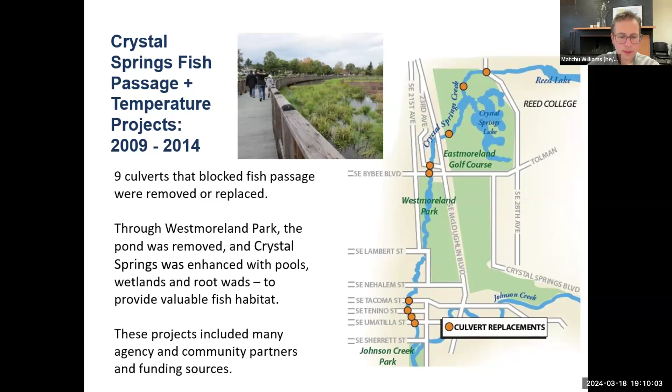So some of the problems and how they get solved. So upper left-hand corner, you can see one of those 9 culverts. It's a corrugated metal pipe. The water is getting squeezed through there, which makes the velocity increase. And the solution to something like this is on the right-hand side.

This was one of the Crystal Springs culvert replacements, where instead of a pipe for a fish to try to get through, you have a much broader opening, and you've got a rocky bottom that matches the stream bed. So it's like a cobbly, rocky bottom, so that fish just have a swim-through condition.

In terms of the lake at Westmoreland Park, the Westmoreland Pond, you can see a before and after picture there. So the upper is the before picture where there was a pond on Crystal Springs at Westmoreland Park. Crystal Springs comes in from the left side. It would go into the lake at a certain temperature, which I'm going to discuss with you in the next slide. It would get heated up in that pond, and then it would come downstream at that higher temperature.

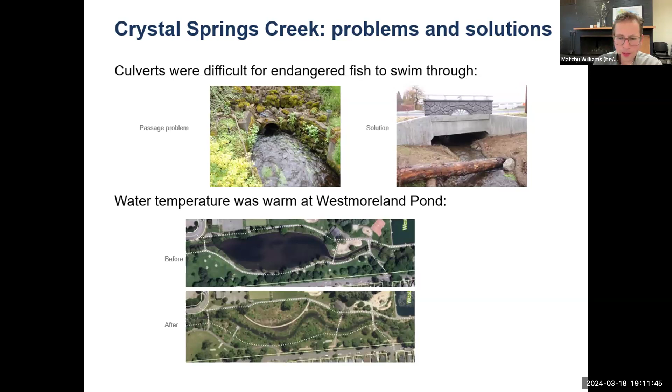Now, on the bottom slide, the current condition is that the water comes in at a certain temperature, and then it just moves through the stream channel at the same temperature and exits at the same temperature. So it doesn't heat up through this stretch anymore. Next slide.

So I'm going to just slow down here for a second. Remember that I said that the springs come out at 13 degrees C. And if you look at both of these charts, you'll notice that they start at 15 and go up. In a slide or two, you'll see a slide that includes the 13-degree area.

So the red line is the water quality standard that we're trying to meet for Crystal Springs Creek, and that's 18 degrees C. Well, let's start with the blue line. The blue line shows you water that was coming in to the Westmoreland Pond back in 2012. And the upper line, the black line, shows you the water temperature of the creek as it left the pond.

So on many days in July here, we're showing you that the pond heated up the water temperature 3+ degrees. And it's already coming in to the project area close to the standard.

At the bottom chart, you can see that after the pond was removed, the black line and the blue line are following each other quite well, meaning that the upstream and downstream temperatures are the same going through this area. So the high temperature was corrected by this action. Next slide.

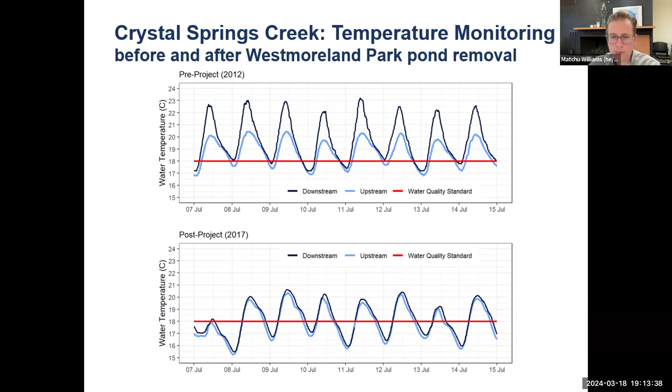All right. Okay, Steve, yeah.

Yeah, thank you, Jennifer. Okay, so Jennifer was talking about the Westmoreland Pond downstream, which is a completed project on Crystal Springs Creek. So we're going to come back now to Crystal Springs Lake itself, where we have a similar situation. We have a number of very cold springs that discharge into Crystal Springs Lake. As Jennifer mentioned, those springs are about 13 degrees Celsius. Well, it's not ice cold, but that cold water comes into the lake basin.

And because the lake is a shallow lake and it's oriented north-south, that water is exposed to the solar radiation, especially in July, August, and early September. So the very cold spring water comes out of the springs. It's in the lake for more than a day, its residence time, and it gets heated up while it's in the lake. BES has recorded temperatures of 20 degrees in the lake, even moving upward toward 25 degrees in the lake. And then that warmer water is discharged downstream as it heads down Crystal Springs Creek.

So we've taken some really cold water, we've warmed it up, and then sent it on downstream. So this project is hoping to reduce the warm up of the water in the lake. And we're gonna show you how in our concept plan here in just a moment.

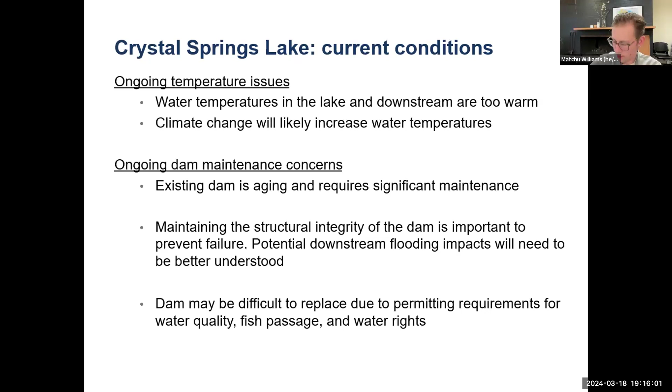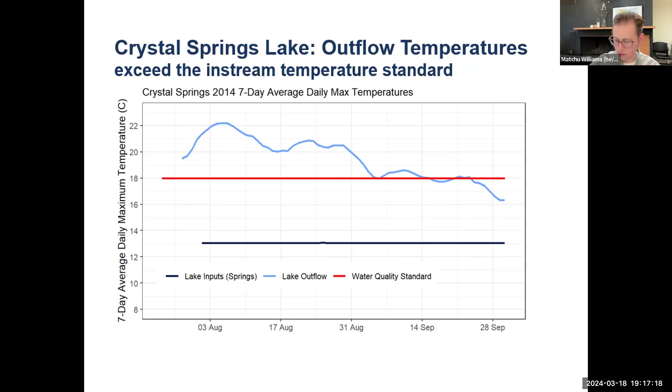All right. Yeah, thank you. We have one last piece here on the existing conditions. Steve mentioned that this dam has been at this location since at least 1920. This is one of two of the main outlets from the lake back down into Crystal Springs Creek. And the dam does not allow fish passage. And over the years that the dam has been in this location, it's required significant maintenance. So this project gives us a real opportunity to improve this outlet from the lake, both from a function perspective and from a maintenance perspective. Next slide, please.

So this project has multiple goals that can address the needs of several stakeholders. The goals are to restore the environmental health and habitat at Crystal Springs Creek by reducing the water temperature from Crystal Springs Lake and improving the habitat along the creek and lake edges; removing, improving, or reconfiguring the dam that'll help reduce the residence time of the water in the lake that Steve was talking about; and removing invasive species with a special focus on yellow flag iris, which many of you have probably seen out there.

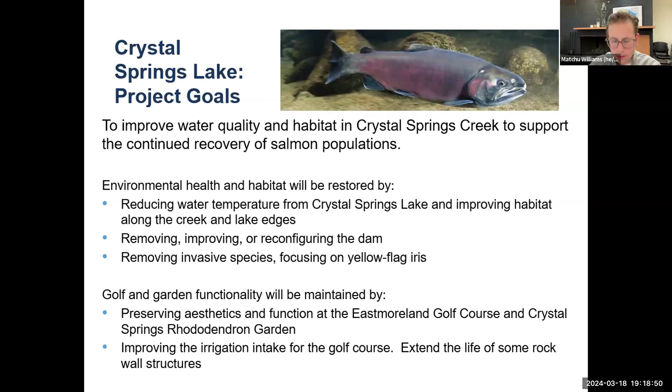Another goal is to maintain or improve the functionality of the rhododendron garden and the Eastmoreland golf course by preserving the aesthetics and the function at both of those locations, and by improving the irrigation intake for the golf course. There's also potential for this project to extend the life of some of the rock wall structures at the garden that have been a maintenance challenge. Next slide, please. I'm handing off to Jennifer.

Great, thank you. In 2019, we started working with project partners to explore a concept planning process to start addressing both the dam and the temperature issues. So here you've got a list. We worked with the Eastmoreland Golf Course and Golf Advisory Committee group, the Friends of Crystal Springs Rhododendron Garden. We did some work with Crystal Springs Partnership, the Native American Community Advisory Committee. We had the Bird Alliance of Oregon and Green Spaces Institute involved, as well as the Johnson Creek Watershed Council.

This early concept planning included those stakeholders, and as we move further along in the project into design, we'd like to involve the neighborhood associations and other partners in the design process. Next slide.

So again, kind of where we are in the project right now, we are just finishing up our concept planning phase, and we'll be talking to you specifically about how we're moving from the concept phase into the design phase. Next slide.

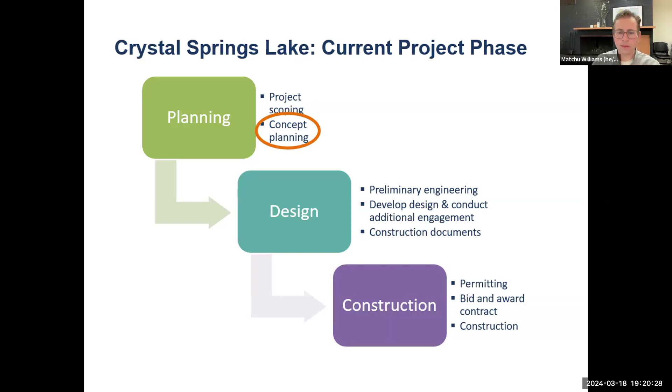And this is just a review of our stakeholder engagement on this project. So in 2019 and 2020, which was when the pandemic began, we did some in-the-field tours. We did workshops, we learned to use Zoom. And then we shared some different concept designs with folks and were able to develop a single concept design that we shared with stakeholders in 2022. And then we got feedback from folks on that, and that is the one that we're going to be sharing with you tonight.

After putting that concept plan together, we did additional work that the project needed and people were interested in. We conducted a biological evaluation and characterization of the site. We did some field work on presence of mussels in the pond, presence of aquatic insects, and then we also looked at a nesting bird survey. We did cost estimating, and then we developed some perspective visuals.

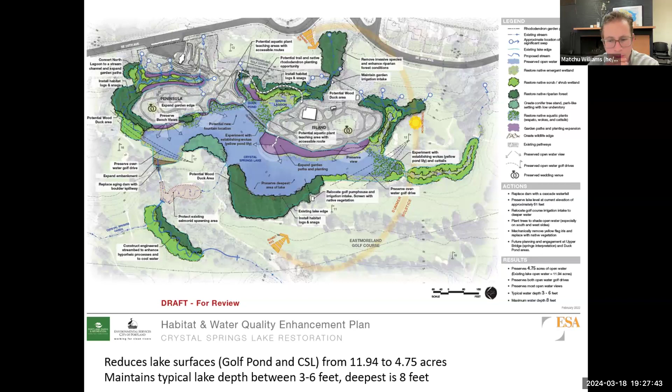Okay, and during the process of developing this concept plan, we worked closely with folks from the rhododendron garden and folks from the golf course. As I mentioned, the garden staff expressed interest in having some additional land to work with to expand their garden a bit. The golf course really wanted to protect those flyover golf drives.

Okay, so alternatives of this concept were modeled by USGS. And what we found was by shrinking the lake, we got immediate cooling benefits in the modeling because of the reduced size of the lake. The tree shading does provide some moderate benefits if we can get trees on the south and west side of the lake. This concept design would significantly reduce lake temperatures, especially under future climate change scenarios. So if we leave it as is right now, the lake will continue to warm as our summers get warmer.

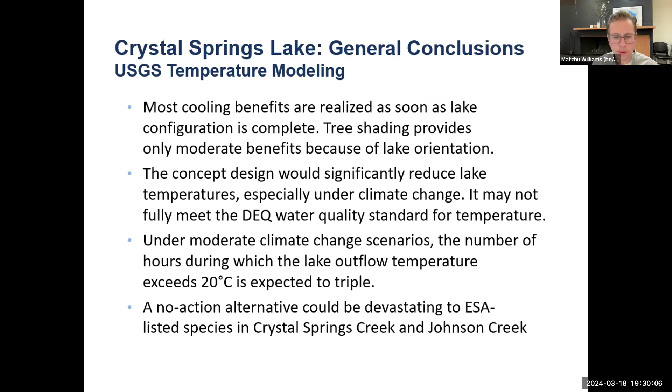Great, thanks, Jennifer. Steve. Yep, gotcha.

So we completed that concept design in 2022, and we were able to move forward then to develop preliminary construction cost estimates of $11.4 million. That, of course, will be refined as we complete the design work, include financial impact if there's any closure to the garden or the golf, include project management and construction oversight.

We also worked with the community, particularly with the Crystal Springs Lake Partnership folks on wood duck and hooded merganser nest surveys as a volunteer opportunity. And we worked with some professional staff to do aquatic invertebrate surveys, and we worked with volunteers on that as well. We also developed 3 perspective visuals based on that concept plan that Steve just showed you, and we'd like to show you 2 of those next.

All right, so this is an artistic representation of the drive on the 17th hole. You see the gentleman here in the tee box, and he's driving out toward, you see the orange flag in the distance that's on the green. You can see some water in between. He's hitting the drive over.

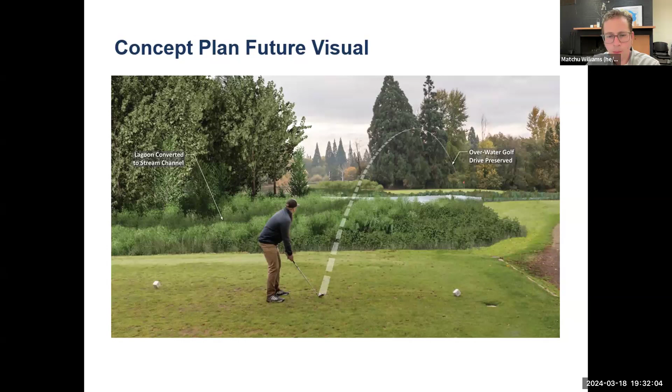In the current condition, there's more open water, but in this potentially restored condition, you can see that there is some wetland vegetation in the foreground, providing habitat and cooling. There's still open water in the midground. And then the golf green is left fully functional off in the distance there. And if we go to the next slide, please.

This is a conceptual view from the garden itself, looking across the lake toward the golf course. You can see in the distance some of those nice habitat snags, the standing dead trees, large wood providing habitat along the shoreline there, native wetland, emergent and shrubby vegetation on the far side. And then in the foreground, you see some expanded garden planting area that the folks at the garden could plant however they see fit through an engagement process.

And one thing we heard that the folks from the garden thought might be nice is to have some extra visual buffer from the golf course. So by creating a nice wildlife edge over on the far side of the lake from the garden, when folks are using the garden, they're looking out at a restored landscape. They're looking out at wildlife, birds, etc. instead of just seeing folks golfing on the other side. So a nice visual benefit. Next slide, please.

All right, so on this slide, we have an overview of some of the permitting factors and other factors in coordination that we'll need to learn more about and that will need to be addressed in order for this project to move forward. One of the things that we're going to need to learn more about is water rights requirements, both for improving the irrigation and for the changes to the dam. We'll need to make sure that the plans that come out of this process comply with all local, state, and federal permit requirements, especially for impacts to waters of the state and for work in the environmental overlay zones that are kind of locally administered.

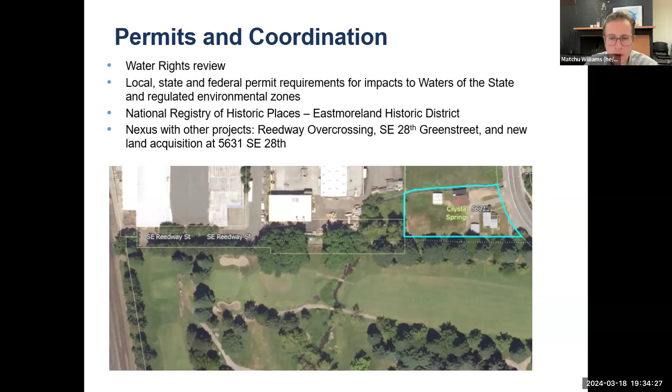We'll have to think about how this work relates to the Eastmoreland Historic District and those requirements. And we'll have to look at nexuses that might exist with other potential projects, like the potential Reedway overcrossing, the Southeast 28th Avenue Green Street, and the new land acquisition by BES at 5631 Southeast 28th. That's shown here in the bright blue box. So that's directly adjacent to the golf course and very close to the garden and very close to this project. Next slide, please.

So looking at some current and next steps for this project. Right now, the project team will be continuing to communicate with engaged stakeholders and sharing some of the information that we've shared out with you today, including the concept plan, the cost estimate, and the visuals. We'll also have a few other briefings with interested stakeholders. We have one more community group briefing this week that you already know about. And then we'll also be continuing to brief city leaders so that everyone is up to speed on the progress the project has made.

And then we'll be coordinating with the U.S. Army Corps of Engineers to explore a Section 206 cost share feasibility study. And I'm just going to pause and invite Amy to say a few more words about that if she'd like, since she is our resident expert on that process. Sure, I'd be happy to.

So yes, looking forward, the city and the Army Corps of Engineers, we will continue our partnership. And really, this is a partnership to bring more money to the project. The Army Corps provides basically 65% of the project cost, and the city provides 35%. And where we are right now is the Army Corps completed what they call their Federal Interest Determination Report. And basically what that is, it's a look at the project to determine, is there an environmental restoration connection to the project? Yes, there is. So their conclusion with this report is there is an interest for the federal government, for the Army Corps, and they will continue to pursue a partnership with us.

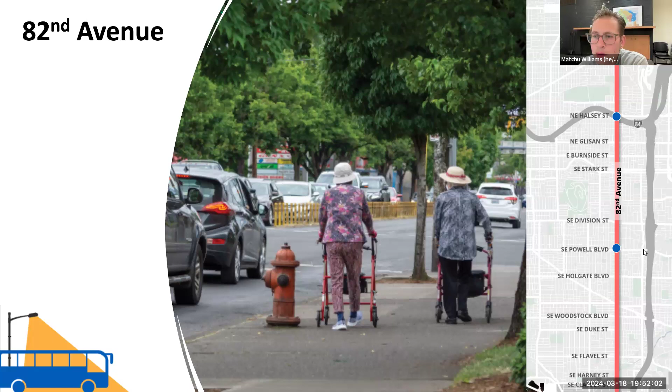We have a ton of projects happening on 82nd Avenue, and because of the sheer size of 82nd, we've split it up into somewhat manageable pieces to deliver. We also have funding that comes from a mix of places, so that defines how we deliver and define the projects. We have two buckets. Critical fixes is all the near-term work, which started in 2023 and goes through 2026. That includes a major maintenance project with paving, lighting, signals, and ramps, a corridor-wide street lighting project, six crossings projects, and additional signal rebuilds. And then we also have the Civic Corridor projects, which will be in design and construction between 2026 and 2030.

So that'll look like additional safety and maintenance projects. They're currently being identified and prioritized. And then also identifying a parallel bike network and projects that would improve the parallel bike network, as well as a transit project that Metro and TriMet are leading, and we're partnering with them on.

Can you pause on that parallel bike network? Are we just talking about the 70s and 80s greenways, or are we talking about enhancement or additional? Yes, and parallel as well as crossing 82nd. Yeah, I think we heard certainly throughout the outreach that we've been doing in the past few years and planning work that if we're not building bike lanes on 82nd as part of this near-term work, we really need to make sure that those parallel greenways are easy to understand, easy to navigate, safe, comfortable, all those things. So we know that especially the 80s greenway needs some more work.

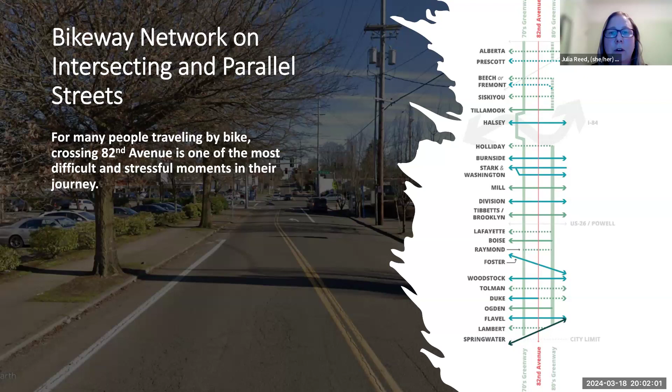Next slide. Okay, great. Part of the work we're doing on 82nd Avenue includes a bike network on intersecting and parallel streets. We know 82nd Avenue is not going to have bike lanes on the corridor itself, and the reason is that any additional space available on 82nd Avenue will go towards the higher classification mode, and that is transit. Transit is, in our TSP, a higher priority than bicycle transportation on this particular street.

That said, we need to provide convenient, comfortable access for folks traveling by bicycle to destinations on 82nd Avenue. So our strategy includes a north-south continuous parallel network a quarter mile from 82nd Avenue. You'll see that as a line on the west side of 82nd in this little ladder diagram. And then a series of bike-safe crossings on 82nd Avenue no more than half a mile apart. Next slide.

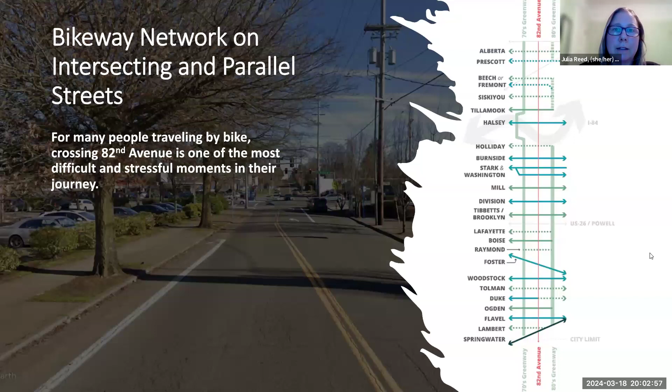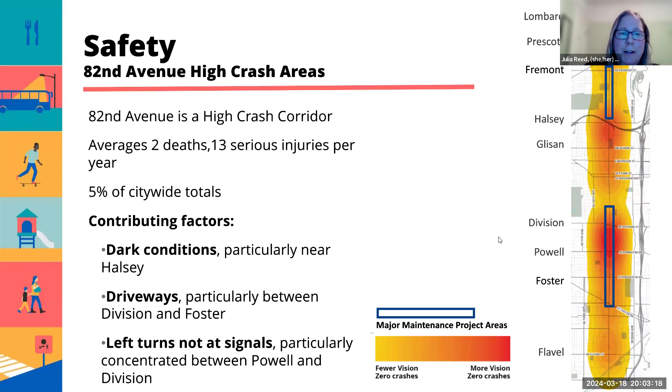Cool. So all of our near-term work was really influenced and informed by the safety history we see on 82nd Avenue. On this slide, we have a heat diagram of 82nd showing where we have Vision Zero crashes, the fatal and serious injury crashes. You see the hot spots in Northeast around Halsey and I-84, coming down to Glisan, and also an area between Division and Powell.

And those blue boxes on top are the segments we chose for the major maintenance project, so they directly correlate with the highest safety needs. We have other projects as well, like a project at Glisan and Davis.

So there's other things happening, but this just has a kind of a summary of what we've seen with safety along the corridor. We have an average of 2 deaths and 13 serious injuries per year, and that's 5% of the citywide totals.

And then when we take a look at some of the contributing factors to those crashes, we see dark conditions, especially near Halsey. So street lighting will really hopefully help with that. We see a lot of crashes related to driveways, especially between Division and Foster. And then left turns not at signals. So that's related to driveways, also between Powell and Division.

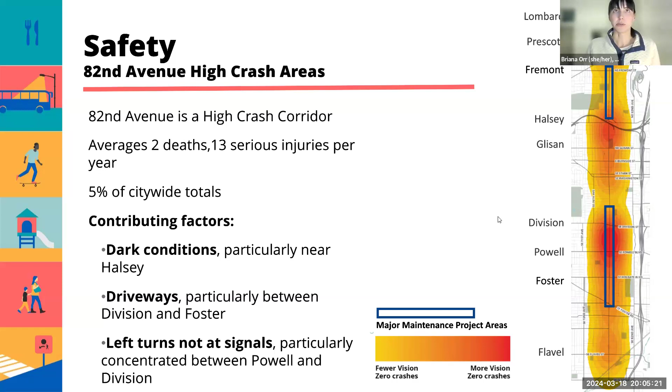So we have, as we mentioned, a number of projects building a number of things. Some of this work started last year, so we had a striping and signing project, as well as a traffic signal technology project to get all of our traffic signals talking to each other so that we can time the signals together, reduce high-end speeding along the corridor. That work is complete. We're still doing a little bit of programming with the signal timing.

And then we have a couple things under construction, including the signalized pedestrian crossings. We have 6 of these currently under construction. And then we have street lighting as part of this package that is starting very soon. We're just waiting on materials to come in for our contractor to start that work.

And then what's coming up is the major maintenance project, which is really a lot of pavement, a lot of curb ramps, as well as a lot of traffic signals coming to the corridor. So all that work is starting this year, as soon as summer or early fall, and continuing through 2026.

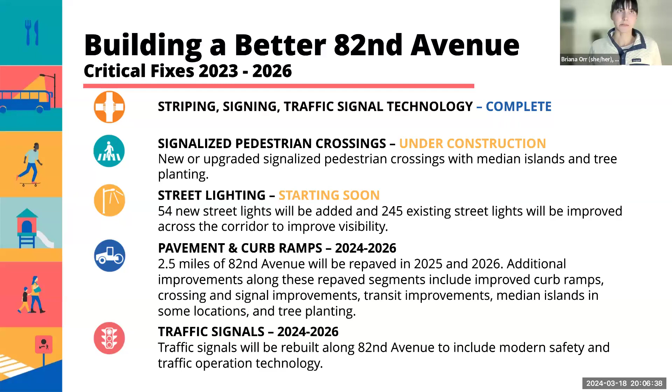And then just focusing on the major maintenance project, this slide has a summary of what we're building through that project. So it's 2 segments, northeast from Fremont to Schuyler and southeast from Mill to Foster. 2.5 miles of repaving, over 200 curb ramps, areas of sidewalk spot widening, 10 new or upgraded traffic signals, 2 new signalized pedestrian crossings, and then we estimate about 250 trees between the medians and along areas where we're widening the sidewalk.

And then on the right-hand side is just a rendering of current conditions. This is at Southeast Mitchell, looking south towards Foster Road, next to SF Supermarket. And there's a before and after. So the after has this wide median island with new trees and vegetation, and then wider sidewalks on either side that also support tree planting there.

On the urban heat island map that Portland State produced, that parking lot right there is one of the brightest points in the whole city, or it's near them. Yeah, I believe it. There's a lot of parking area right around here, a lot of concrete. Is there a plan for maintenance of the street trees? I just raise the question because I've seen some recent plantings at Portland Parks fail in recent years, given the heat. Yeah, climate change.

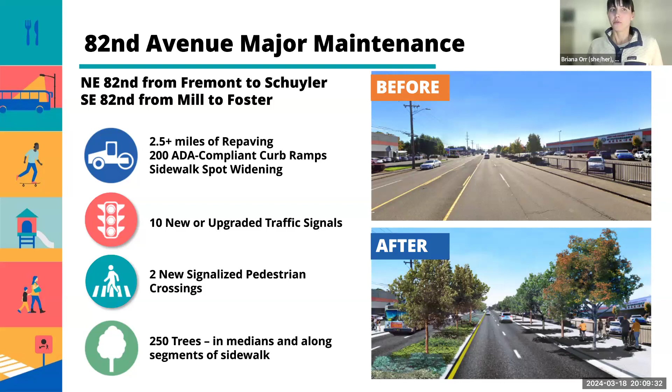Okay, thank you. Yeah, and I'll just mention too, we are doing a number of things to give these trees the best chance at thriving. We are going to be excavating those median islands all the way down to soil, so the roots can have a lot more area to grow. And we're also selecting trees that are drought tolerant, and both our landscape architect and urban forestry think that they are good trees to have in this context. So hopefully we won't have a repeat of that park issue.

Yeah, I'm really looking forward to it. Yeah.

So major maintenance, the 60% design is available now for comments. It goes through block by block on the project extents. So you can really dive in and see if you're interested in a particular area, or if you live right off the corridor, you can take a look and see what's happening on 82nd near you. And this is all updated from our 30% design, which we released this time last year.

And after that design release, we did a bunch of public engagement, heard from a lot of folks, took in their comments. We went door to door to businesses along the project extents. And so this is the result of that feedback, made changes and tweaks, especially to access points along the corridor, and making sure that freight delivery and businesses have what they need to do their day-to-day. So I can add this link in the chat as well. And then we're really interested in feedback and comments through the end of the month.

And then where we're headed from here with this particular project, we're finalizing designs this spring. In summer, we'll be going to City Council for approval of the contract, and then construction could begin as soon as summer or early fall. That construction will probably look like underground work at sewers, like electrical conduit, and then maybe seeing some ADA ramps starting this winter. And so that'll be some of the more visible and I think really exciting work.

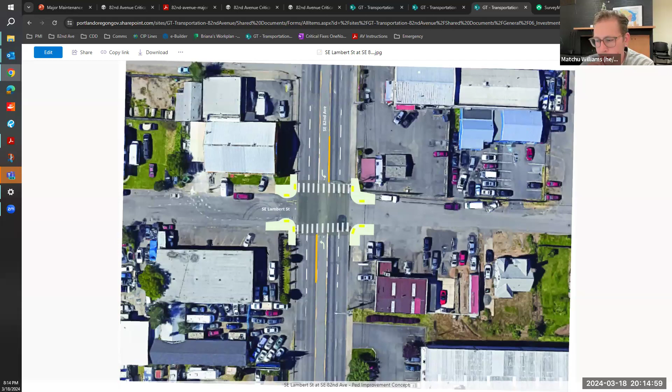I noticed there's no cross bikes. Is that because of like traffic volume or value engineering, or I guess what's the design choice? Yeah, this is a really simplified concept. And so I would have to go back to our plan set and see if the cross bikes are part of this or not. If they're not, I imagine it's because there's not actually a conflict that should be happening because there's a signal.

So typically we're using those cross bikes to indicate that drivers should be aware and look for bikes. But if everybody has a signal and has a red light, then there really shouldn't be that issue. But I'll double check, Matchu.

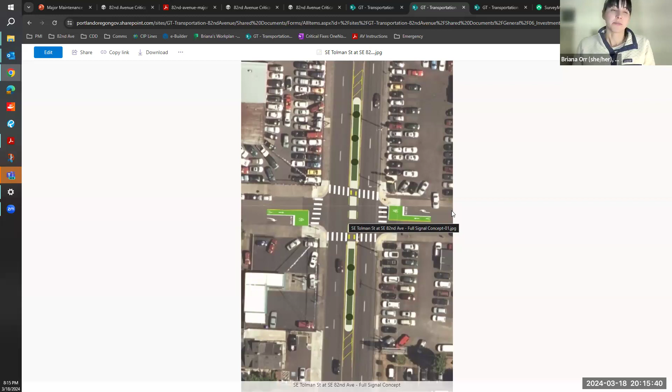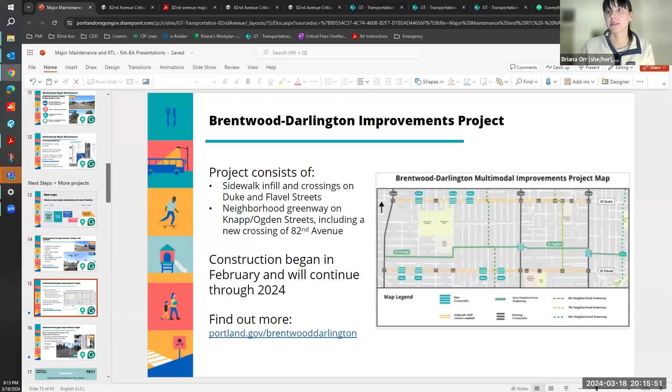Thank you. Yeah. All right, let me go back to our presentation here, and then I'll hand it off to Bryan to talk about Darlington. Okay, thanks. Yeah, and I'll let you control the slides.

There we go. Yeah, so just wanted to share about a project that actually is in construction already. We have started work on Flavel right now, filling in some sidewalks, and we're excited to get going on this project. I know it's been a community priority for the Brentwood-Darlington neighborhood for 7-8 years now, and so really excited to get this one across the finish line.

It's sidewalk infill and more crossings on both Duke and Flavel streets, and then we're also going to be constructing a neighborhood greenway on Knapp and Ogden streets. You can see on the map on the right how that jogs from Knapp to Ogden and then back to Knapp. And the crossing is actually right there on 82nd, where it transitions from Ogden back down to Knapp, and it will connect to the 80s Greenway.

So excited about starting it. Construction did start last month, and we're anticipating this to go probably through late fall into the early winter of 2024. And the project website is at the bottom, you can see.

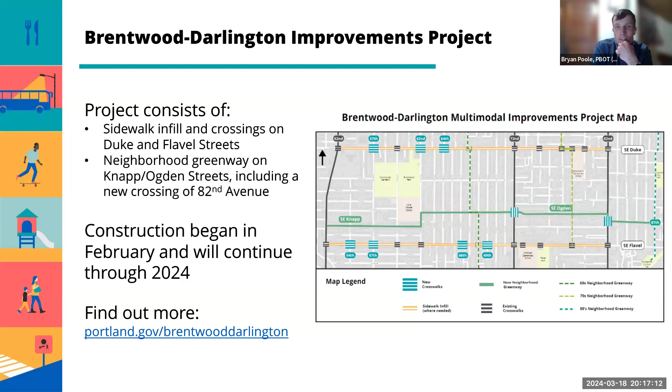And if you go to the next slide, it just zooms in a bit more on what that crossing will look like. Somewhat similar to the ones we just saw, but it's going to have a two-way cycle track on the west side of 82nd Avenue between Knapp and Ogden. So if you're biking or walking, you can go along that west side, and then it'll be a traffic signal with a median to get you across the street, with new ADA ramps,

and like I said, a median full signal. So this will likely be more at the back end of the project, so likely starting in August, early September. Some of that is to avoid the ODOT work that's happening right now, but also we're trying to procure some of the signal poles and those types of things. So it's coming, and we're excited, and hopefully it's a good complement to the other work that you just heard about on 82nd Avenue. So thanks.

And I know recently, maybe a year or two ago, the city did a little bit of eminent domain to make sure sidewalk widths were accurate in this part of the neighborhood, which was great to see that necessary work happening. Yeah, we had to get a lot of right-of-way for this project. That's one of the reasons why it took so long to get to construction. Well, exciting. Thank you.

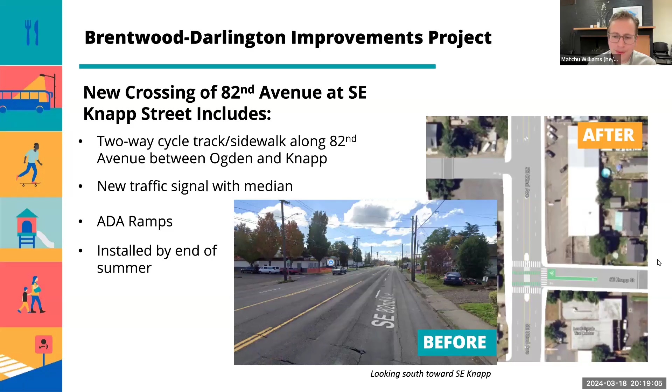All right, I think that's what we have for you. But yeah, happy to go through anything in more detail or look at any maps. So take any questions. And I do apologize, Jeffrey, I didn't provide an opportunity if you want to say hello earlier. But thank you all for this update.

We don't have a time certain date. Do we have council right now on? Not time certain, but we're aiming for mid-June. So yeah, I will definitely let you know. It'd be great to have some folks come out and let folks know that they're supportive, if that's how you feel. Like you always hear about the downsides, but the positive is really important too, to demonstrate the need and demand for these important projects. Absolutely.